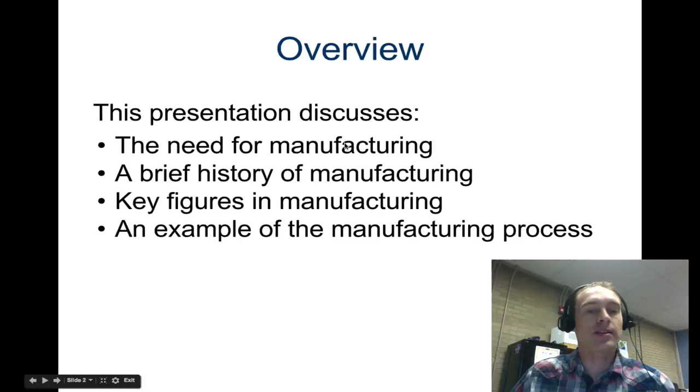What we're going to look at today is the need for manufacturing, history of manufacturing, key figures, and examples of the process. So let's first look at why even manufacturing.

The reason it is very important and significant, which you might want to check on your note sheet because this is one of the first questions, the need for manufacturing, is that it accounts for 20% of the U.S. gross domestic product and employs 17% of the workforce. That's almost 1 out of 5 people in the United States employed in some type of manufacturing job.

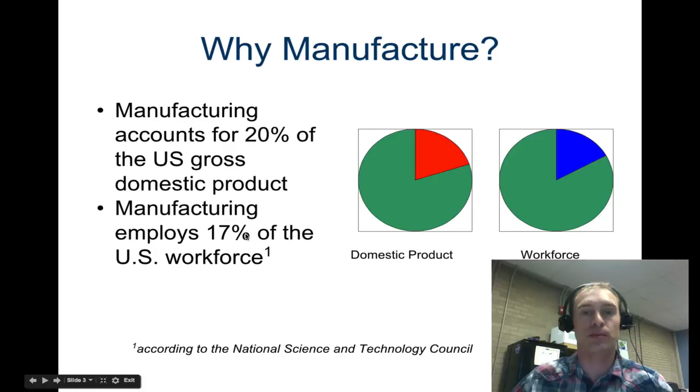Manufacturing started out originally prior to the 19th century when things were made by artisans, and artisans are just people skilled in a particular field. You can see this dude here chiseling some stuff out with a wooden tool, and everything is handmade. Everything is slightly different.

People start to pay a lot more for handmade things because everything is being mass produced. But things can be produced a lot quicker now with mass production and manufacturing. So being an artisan is more of a hobby and a craft for much of the United States.

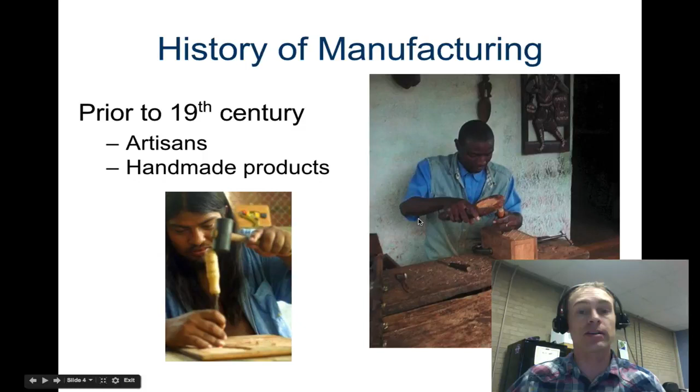Prior to the 19th century, Eli Whitney was really one of the innovators or initiators of the history of manufacturing, and he was most famous for this doohickey here, which is the cotton gin. But he went bankrupt because he was a bad businessman.

So he left the South, went to the North, and took on the project of mass producing muskets, which led to the invention of the milling machine, right here. Many of you have watched a video about how Lego even used milling machines last year.

He quickly realized he had to break down this process of mass production into really small parts, and came up with the idea of interchangeable parts. He'd make many of one type of piece, and if that broke, you could swap it out with something else. So one of his big ideas was interchangeable parts.

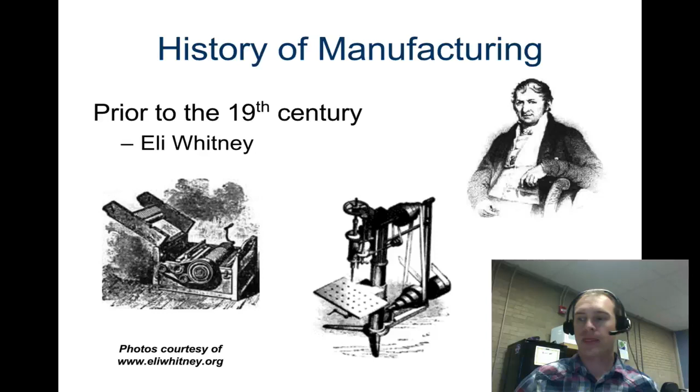Then we get to the early 1900s, which is Henry Ford, and he revolutionized manufacturing with the introduction of the assembly line. You can see these people assembling. The idea was that if the assembly process was broken down into small steps, anybody could do it. So they hired anybody, with really small, simple steps that anybody could do. It was dangerous.

They didn't really have safety practices because this was all brand new. This started in 1908, but in 1911, 200 fingers were severed that year alone, just a little tidbit for you. But the workforce was happy because he more than doubled the daily wage from $2.25 per day to $5 per day. So they figured, who needs 10 fingers, right?

They made so many, about 8,000 per day, that the cost came down to $300. So even the workers, after a couple years of paying expenses and living expenses, could afford their own, which was pretty remarkable.

Henry Ford was also responsible for the first death by a robot, the first Terminator, when a worker was hit in the head by a robotic arm. That wasn't actually Henry Ford himself, it was Ford Motor Company, and that happened in 1979, much, much later.

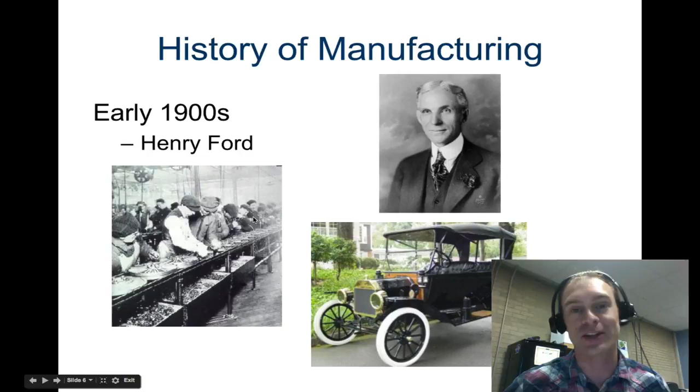If you're interested in other Model T facts, you can check out this presentation at the bottom of the notes. It was 20 horsepower, went about 45 miles per hour, and interestingly enough, it got about 13 to 21 miles per gallon, which is pretty much how modern trucks of today perform.

So let's continue into the early 1900s, with Kiichiro Toyoda. He introduced lean manufacturing and just-in-time manufacturing. Just-in-time manufacturing, which we're going to get to, means that all the parts arrive just when you need them.

So you don't need to have warehouses full of stuff. If you're going to build a toilet, you don't have a warehouse full of little flushing handles. A truck delivers them all the day that you're building them. So if you're going to manufacture 2,000 toilets, or 200 toilets in a day, then the truck comes that morning with 200 levers, and you just use them all up.

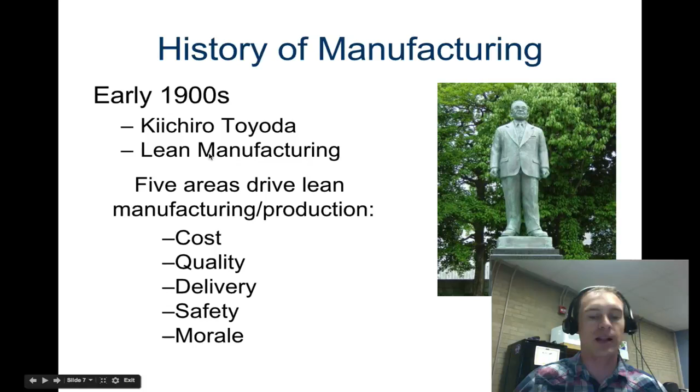That's just-in-time manufacturing. He also introduced the idea of Kaizen, which just means good change. It's the idea of continuous improvement, always looking at what we can improve, how we can innovate, how we can make things better and better. That's a lot about lean manufacturing, which we'll look at here in a bit.

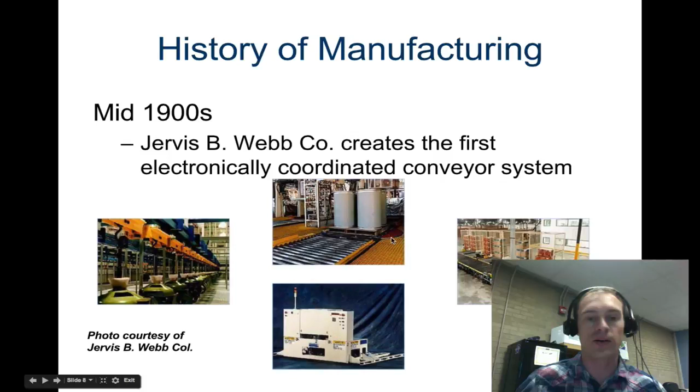In the mid-1900s, the Jervis B. Webb Company created the first coordinated conveyor system, and they continue to work in conveyor systems even today, offering a lot of variety. So you're going to get to work with a lot of conveyor systems with VEX Robotics, or you already have probably.

Now today we have three systems you're going to hear about a lot. You've maybe already heard about them a little bit, but first is the Automatic Storage and Retrieval System, ASRS. With these, it's just something that moves material back and forth and transfers it.

Think of an automated library of some kind, where you have a computer that picks up the book and delivers it to the person. Then you check it in, it reads the barcode, and it knows exactly where that book needs to go. So you have an automated library system.

These exist. Same thing with data, where you have an automated data system that goes and grabs the data file. Maybe it's a bank of CDs, or a hard drive bank for large companies doing data storage and retrieval. Next is automated guided vehicles.

These are vehicles that run by following some trigger. We are going to make some automated guided vehicles - or actually some of you probably did in the last unit - that follow lines. The line followers are automated guided vehicles. They're automated, but they have to be guided using some type of technique.

And AI is artificial intelligence - that's where machines learn from experience. If it does something and it gets an error, then maybe it gives itself feedback and says, don't do that again, reset the limit so it doesn't move that far and hit something, whatever it is.

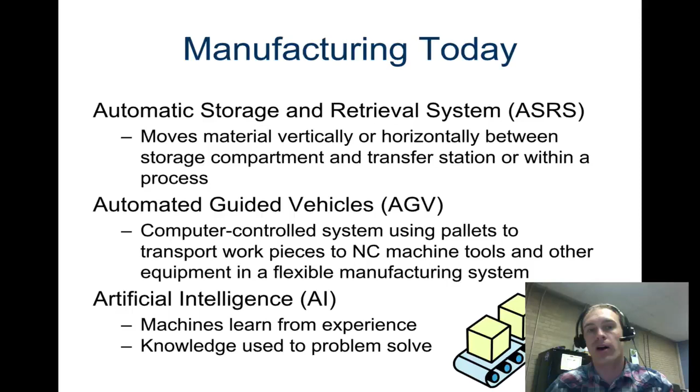That's AI. Manufacturing today is generally referred to as computer integrated manufacturing - that's CIM, and that is the name of this class. In most manufacturing companies, you have a company-wide management philosophy for planning, integration, and implementation of automation, and this is called the Manufacturing Enterprise Wheel, which we'll talk about in an upcoming presentation.

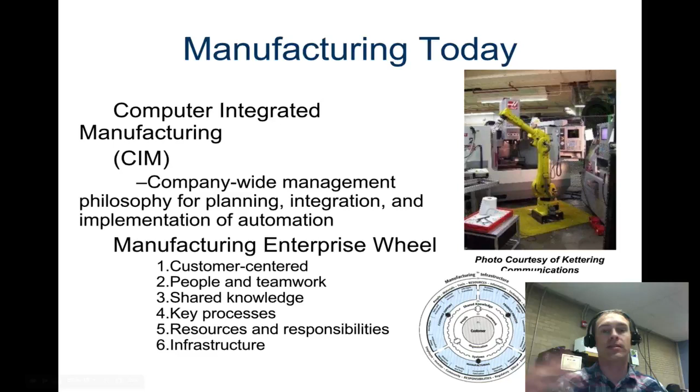There's one main idea, and that's at the very center of this wheel. If you're watching full screen, you can read it now, and that is the most important piece. It really started in the 1980s, so 30 years ago in the history of how things have been manufactured - really not that long ago.

Back to the word Kaizen - it means improvement, and it is based on continuous improvement by all people, from cleanup crews to the head executives. Everyone is looking at how we can improve, how we can make our job more efficient, make it better. That is Kaizen.

A flexible manufacturing system is something that adapts to a changing need. If you want to manufacture more than one type of item - let's say you're manufacturing toys for McDonald's play sets, maybe little plastic cars but different colors - robots attaching wheels might use flexible manufacturing code that would load into the robot and say, okay, now that we've manufactured 100 with small wheels, now we're going to pick up wheels from another bin that are a little larger and apply those wheels.

Or maybe it's sprayed with some type of paint, although they don't really do that with McDonald's toys because kids eat them and get sick and die. We don't want that, so they're now usually molded solid color plastic.

But let's say you have an item that needs to be painted. Maybe you need 3,000 of them that are red, so they're painted red, and the code is counting. Once 3,000 hits, we have a different color that we spray them with. So that is flexible manufacturing, and it can increase productivity by a lot, up to 50%, because you don't have to stop the line. A person doesn't have to be involved, it's just counting units where it makes its change.

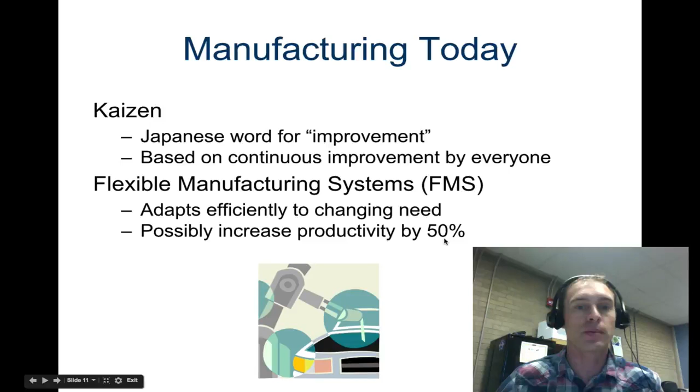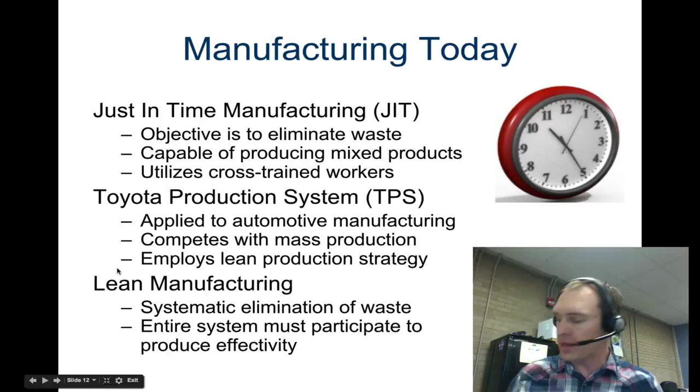Just-in-time manufacturing, we've talked about this. Objects arrive just when they're needed. The Toyota production system applies to automotive manufacturing. It began in the 1980s to make manufacturing more productive, and the idea is this employs a lean production strategy. We don't really need to talk too much about TPS per se, but lean manufacturing is just a systematic elimination of waste. How can we get rid of the things we don't need and make everything a lot more efficient and productive? So again, I think we just covered the core philosophy of lean manufacturing.

And the last thing that we're going to take a look at is Six Sigma. Six Sigma indicates measures of quality for near perfection. If you produce fewer than 3.4 defects per 1 million opportunities, you have reached Six Sigma. And the sigma is a standard deviation, so 6 standard deviations from average. You can talk with some of your math teachers about what standard deviation means, and that can be a great discussion about how that applies to Six Sigma. So 6 standard deviations back is 3.4 defects per million.

And in order to reach that, you really have to identify and correct what's causing the defects. So you're always looking at trying to improve, continuous improvement. You really have to look again at what's causing this. That is the goal of most manufacturing, is to reach Six Sigma. So you may hear, how can we reach Six Sigma? Somewhere in your life, someone is going to be talking about that.

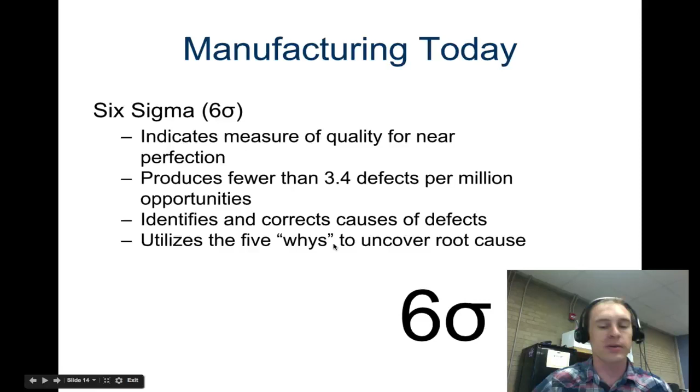Almost guarantee it. And finally, we look at manufacturing of today using rapid prototyping. We have some of them, and the ones that we have are fused deposition modeling. It's using plastic and putting plastic down, 3D printing, that's what we call them. Selective laser sintering and stereolithography. We're going to look at videos of how those work later on.

A work cell is a group of manufacturing pieces all connected together. In our milling room, we have the mill and we have a robotic arm. We may also include a sander. That would be a work cell, where everything is kind of all next to each other, where they can be working sort of together, even with a human moving them side to side or with a robot.

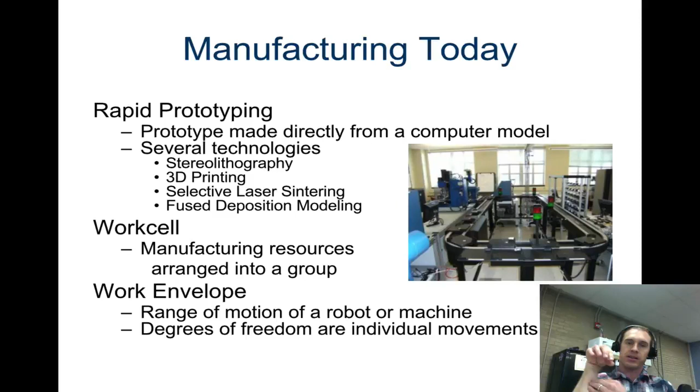And finally, a work envelope is just the range of motion of a robot. Robots can't go forever, they can't get up and walk, well, some can. But for manufacturing, our milling machine has a work envelope. It can only go so far in the X direction, the Y direction, and the Z direction, and that's its work envelope, the entire range of motion. The robotic arm that we have in the milling room is the same thing, it has a range of motion. How far can it reach? Where can it place objects? It can't continue to move back forever, just like my arm can't, because it kinks on itself. So there is a work envelope, and that bell signifies we are done.